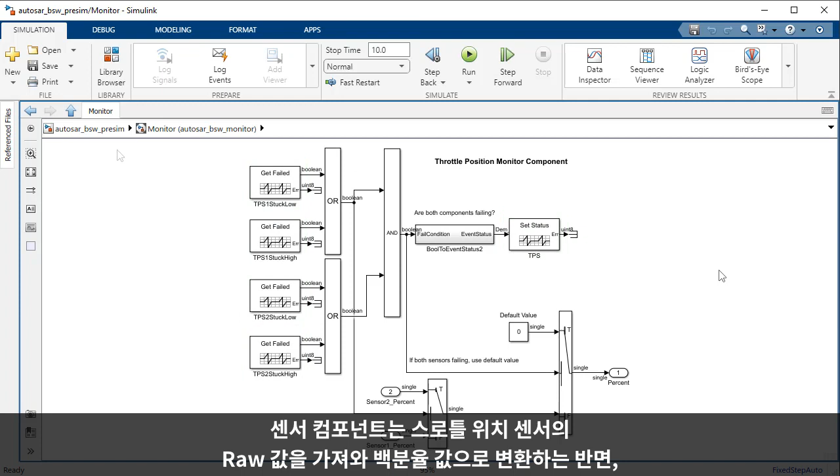Here is a throttle position integration model which integrates two throttle position sensor components and a throttle position monitor component. These components contain calls to basic software services. The sensor components take a raw throttle position sensor value and convert it to a percent value, whereas the monitor component takes the percent values provided by the sensor components and decides which signal to pass through.

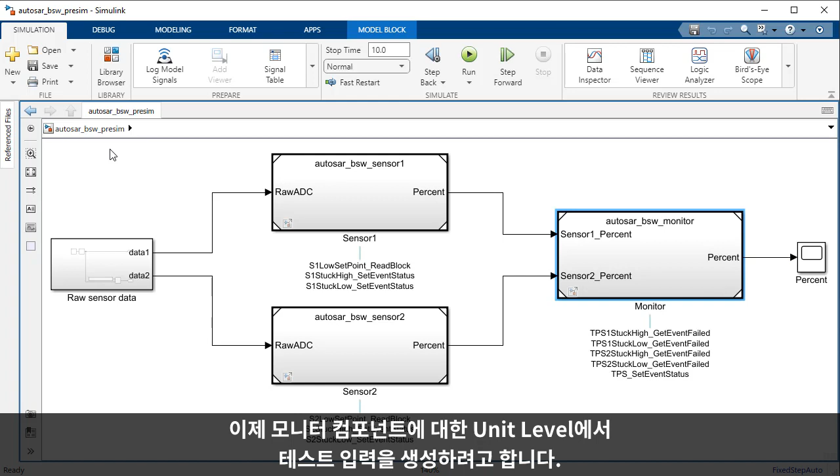Now, suppose you want to generate input test vectors at unit level for the monitor component. To do so, first we will open the Design Verifier pane on the Simulink toolstrip, select the component under test, and then run Design Verifier analysis.

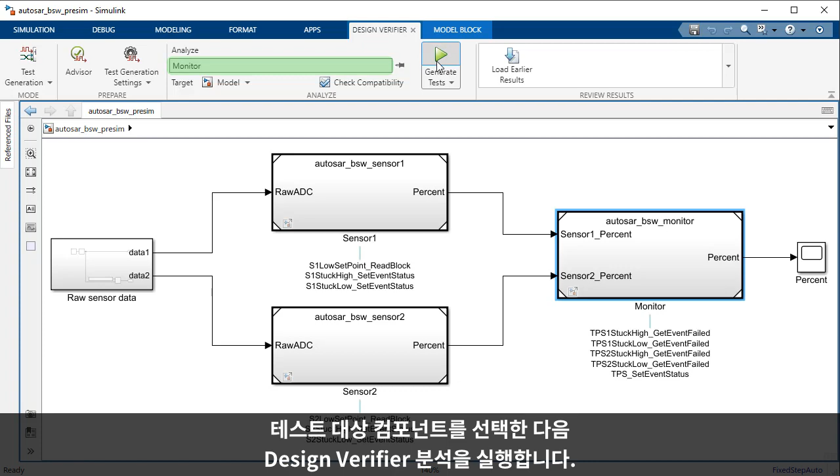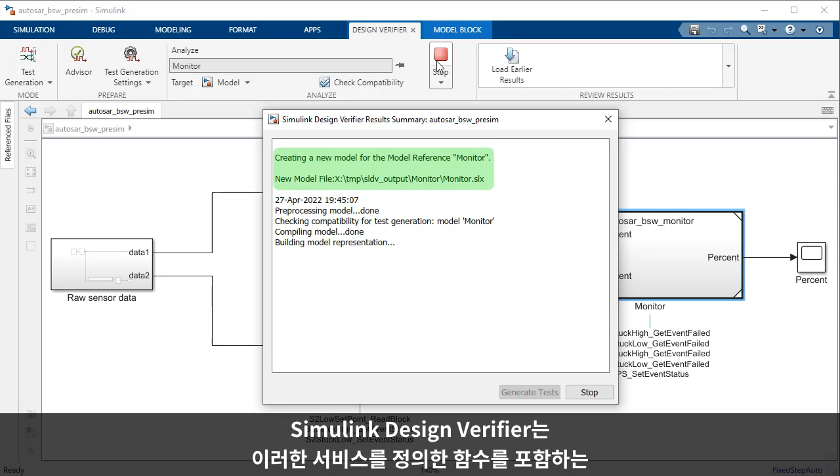As you might know, to simulate the AUTOSAR component that calls basic software services, we need to insert reference implementations of the corresponding services. Simulink Design Verifier achieves this by generating an analysis harness which contains Simulink functions that define these services. A quick look at the harness indicates these functions being defined such that they output any possible value within the supported range of the output data type.

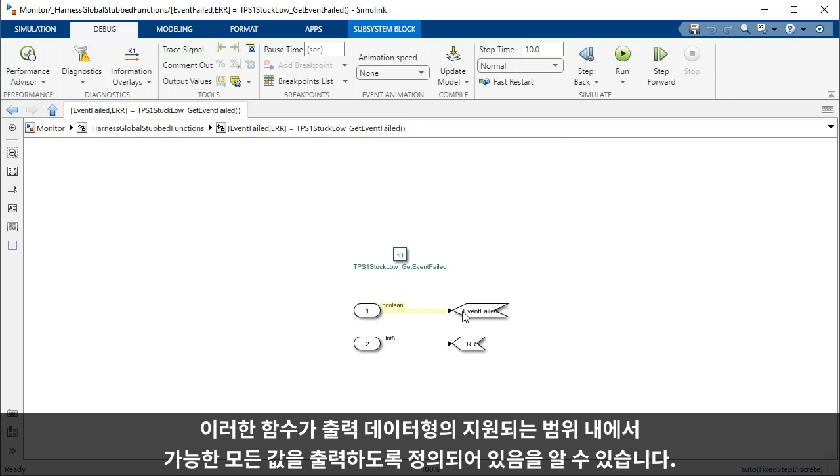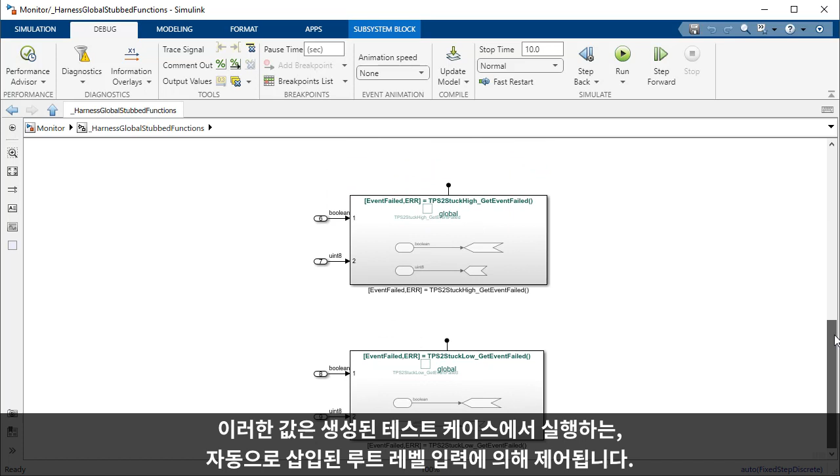These values are controlled by the automatically inserted root level inputs which are driven by the generated test cases. Another thing to note here is that multiple calls to these functions within a single step would return the same values.

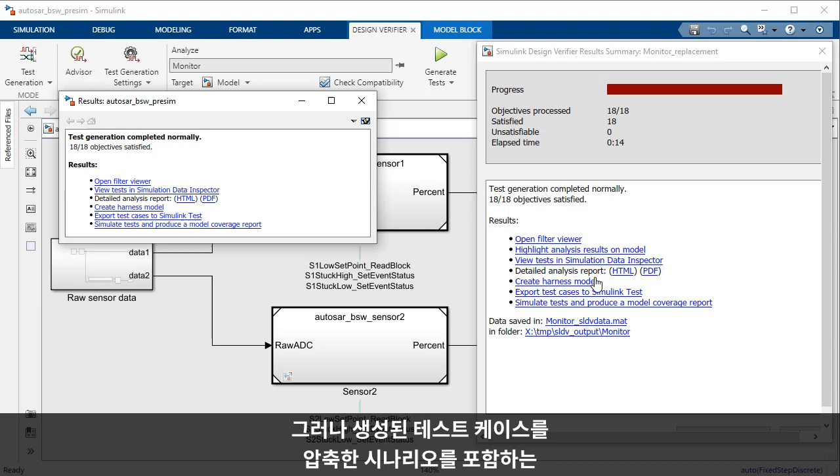Coming back to the analysis, you can see that when the software completes analyzing this harness, the results summary window displays that the software identified 18 coverage objectives for the component and was able to generate test cases that satisfy all these objectives. These generated test cases get saved in a MAT file by default, but you can also choose to save the test vectors in a test harness by creating a harness model which uses a Signal Editor block containing scenarios that are comprised of the generated test cases.

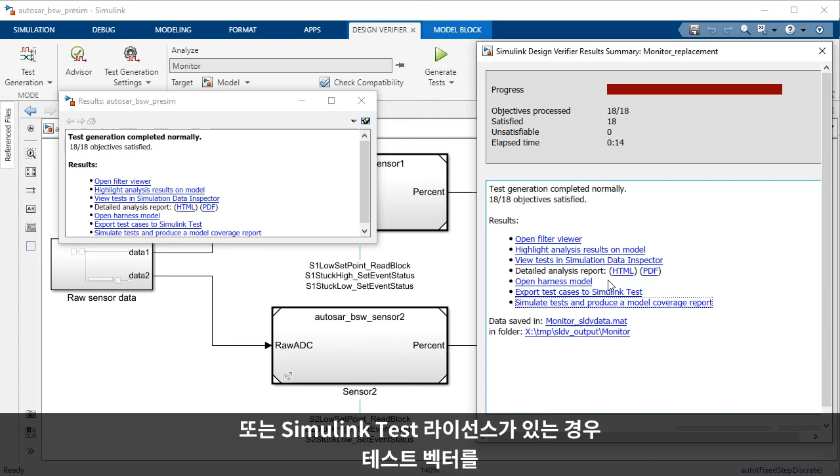Alternatively, if you have a Simulink Test license, you can also choose to export the test vectors to new test cases automatically created in the Simulink Test Manager. This way, you can build your test suite comprising test cases for different components of your system model.

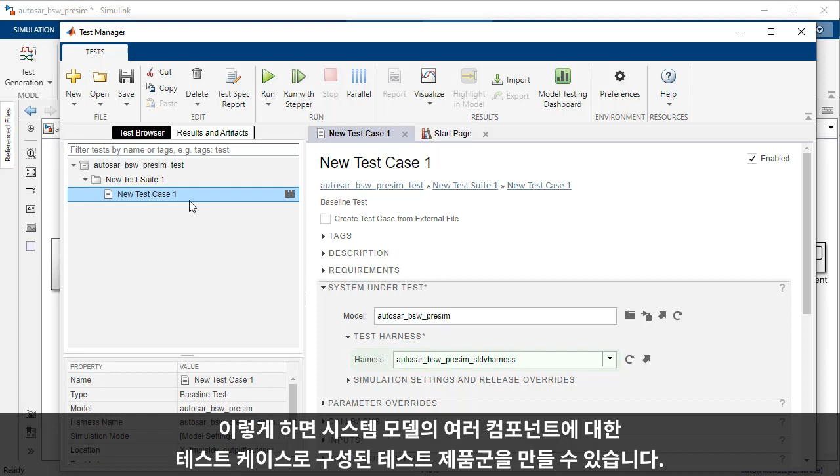Do you know that generating input test vectors is not the only supported analysis mode? Design Verifier can also identify design errors and prove requirements compliance of your component model depending on the analysis mode selected.

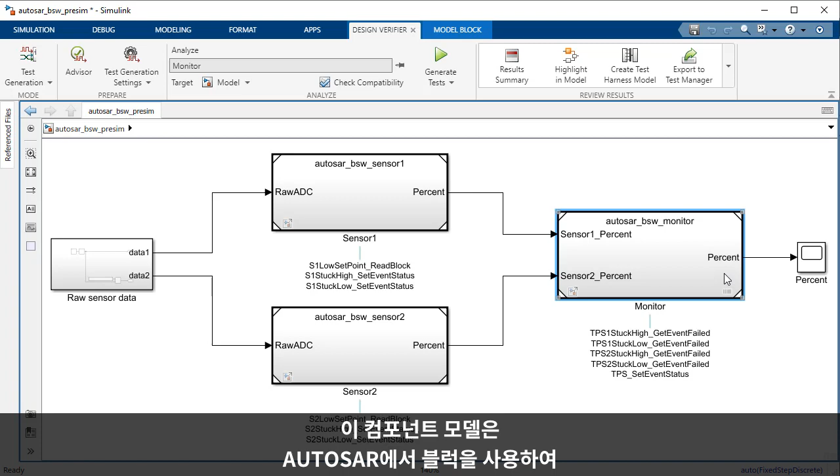So, in this video, you have seen how to generate unit tests using Design Verifier for a component model which implements calls to basic software service interfaces using blocks from the AUTOSAR Blockset. But you can also perform similar analysis when you have a Simulink model created by importing an ARXML file. That's cool, isn't it?

Additionally, you can also use Design Verifier to generate test input scenarios for back-to-back testing to ensure equivalence between models and their associated code. To learn more, you can visit our Simulink Design Verifier product page on mathworks.com.